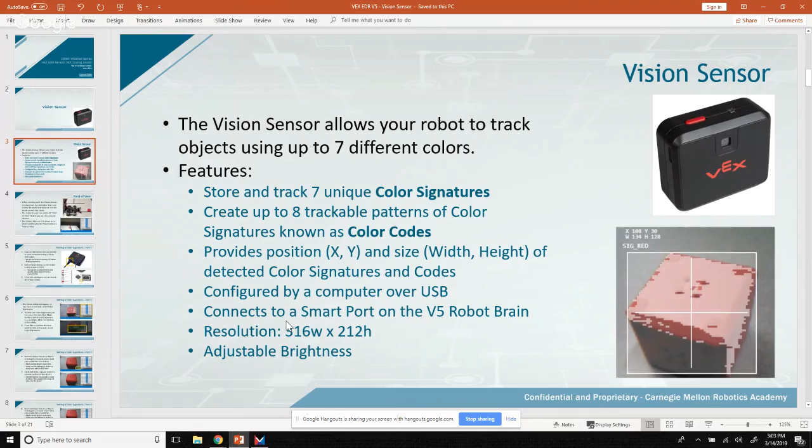So as I mentioned, a big thing that you want to keep in mind with this sensor is something called field of view, which is just understanding how the sensor sees the world.

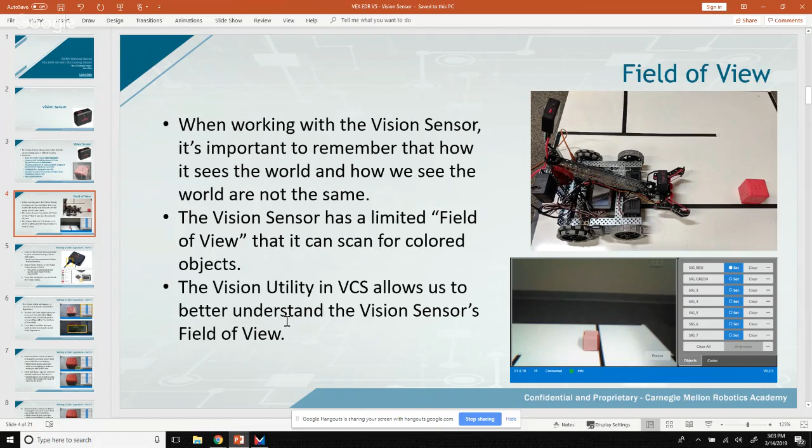Okay, so to get started with the vision sensor, one of the first things that you'll need to do is configure it to train these different colors. Doing so is a relatively straightforward process, but there are a number of steps.

The very first step is to connect the vision sensor to your computer using the micro USB cable. If you look at the bottom of your vision sensor, you'll notice there are 3 different ports: a USB port, a VEX port, and a V5 port. To train it, we will do so over USB.

Next, inside of the training process, we have to add the vision sensor to the robot config screen of VEX Coding Studio. I will actually show these steps after I go over them in the slides - I'll bring up the utility and show all this, but I do want to make sure these steps are all documented for whenever you play it back or try to follow along.

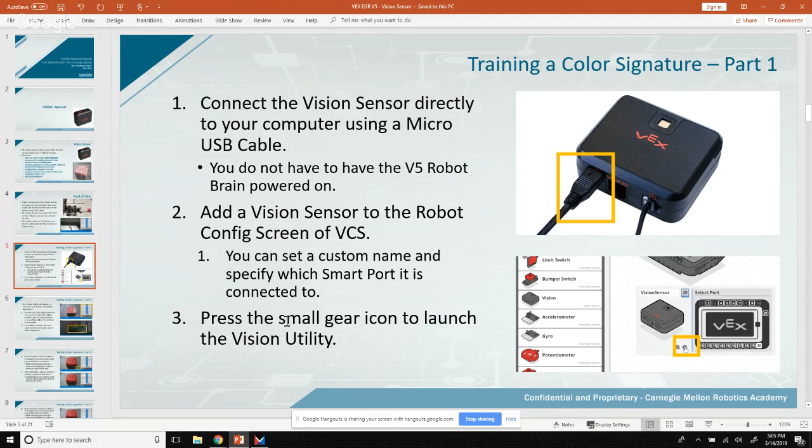Okay, so you drag a vision sensor into the robot config screen. That allows you to give it a custom name, and it allows you to set which port it's connected to - all important stuff. But then also there's the small gear icon in the bottom of the config. If you click on that, it will launch something called the Vision utility.

Okay, so when the Vision utility appears, it has tabs for colored objects and also codes. By default, the object screen should appear. Your vision sensor may have already been trained - it may have some training data. If you want to train it, you can hit the Clear All button, or you can individually clear each signature that is inside of there.

To begin training your vision sensor for a custom object, aim it so that the field of view is prominently facing the desired object. Solid colored objects work best here.

Almost as if you were drawing a square in Microsoft Paint, you click and drag a square over top of that object. This is important because a colored object isn't actually one color. Depending on how light hits it, and what type of light hits it, it's actually a range of different colors to the camera. We might identify a red cube as red, but the sensor sees different hues and color codes across all the pixels that make up the cube. So drawing a square over top of it tells the sensor you want that range of colors to be defined and stored.

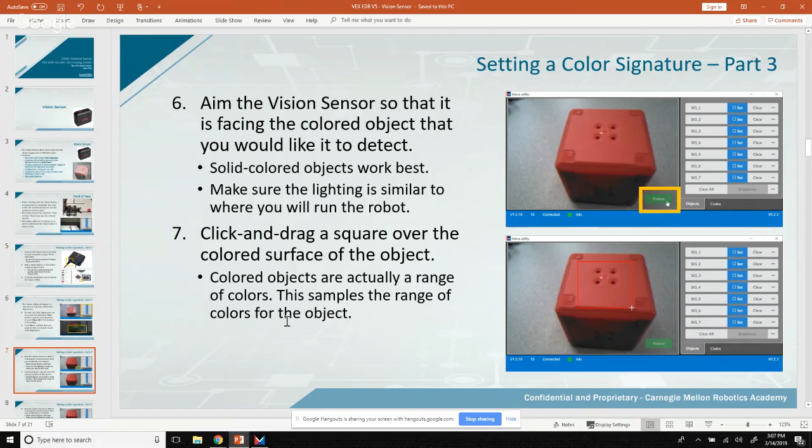While you are aiming the vision sensor at that object, you can press the freeze button, which will freeze the frame so it won't move around on you. Then you click and drag that square over top of the object.

Once you've drawn a good square over the object, choose one of the set boxes on the right side. You should notice the frame immediately gets filled with a box and a semi-transparent layer that shows how much of the object is being recognized by the color signature. If after pressing set you only get spotty coverage, that might mean your initial square wasn't big enough.

But you can also adjust it. If you find that your bounding box, the square, is either not inclusive enough or too inclusive, you can use the slider to the right of the signature to increase or decrease the tolerance.

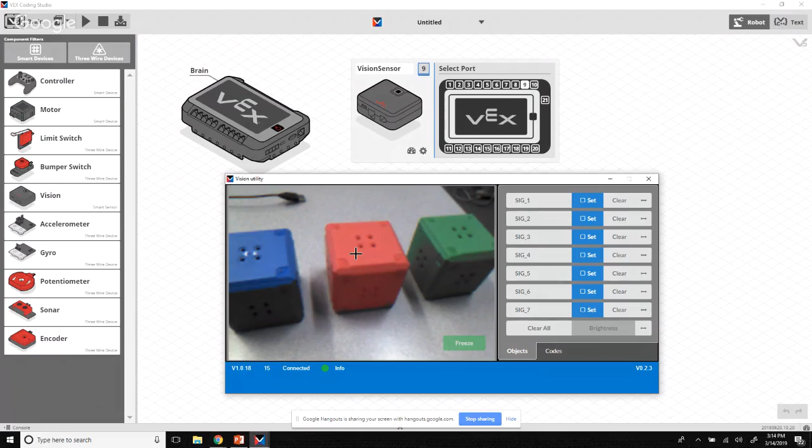I'll start with red. I'll click and drag a square over top of my red cube, choose set, and you can see immediately it begins recognizing SIG1 as that color range. I think I could safely increase it a little bit to pick up some more colors there.

Then I'll change the default name to SIG Red. I can draw another box if I want around another one of the objects, say blue.

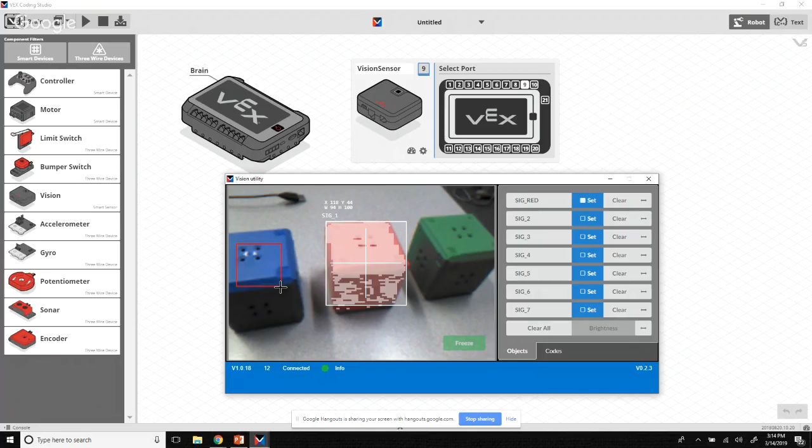What to be careful of is if you drag your slider too far, you start to pick up unwanted colors from the environment. So in addition to having good coverage of your object, make sure that you're not capturing colors that show up inside of the background.

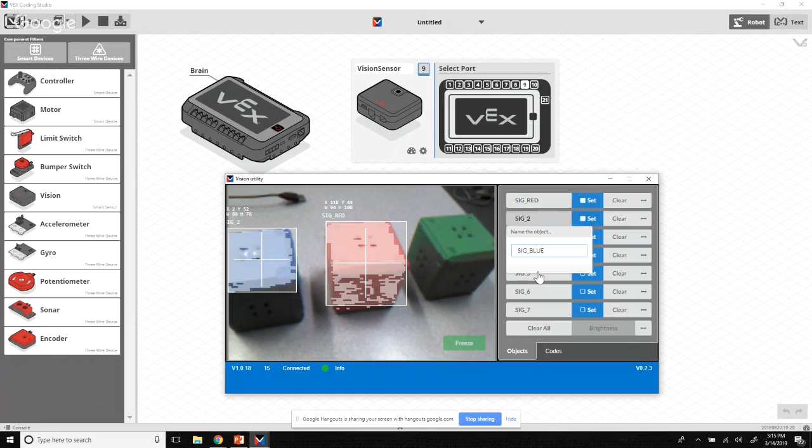I'll also change the name of that to Sig Blue. Now, if I unfreeze it, I can see that my robot, specifically the vision sensor, is able to detect sig red and sig blue as I move it around.

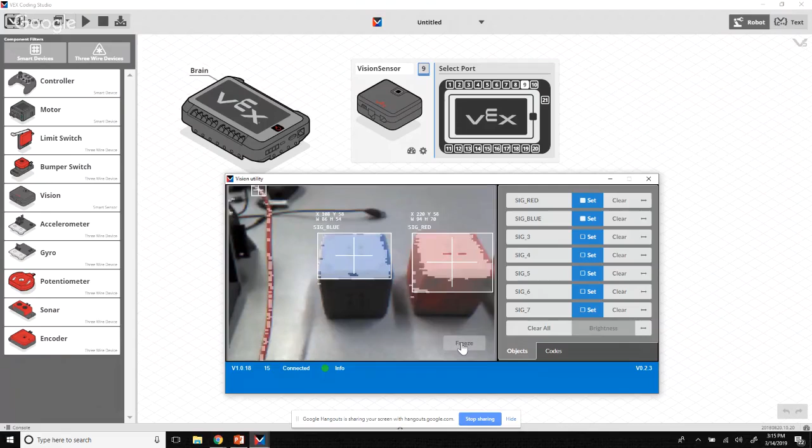That's pretty cool. Not only can it give me an idea of how far away, but it can also tell me which object is which—it can find the red object versus the blue object, which is super helpful for a ton of applications.

If you're thinking about using this inside of a competition, you can imagine how you might use this to find a game object, to shoot at a goal, or locate a different goal. It depends on the different games, but there are certainly a ton of applications to make your robot pretty smart here.

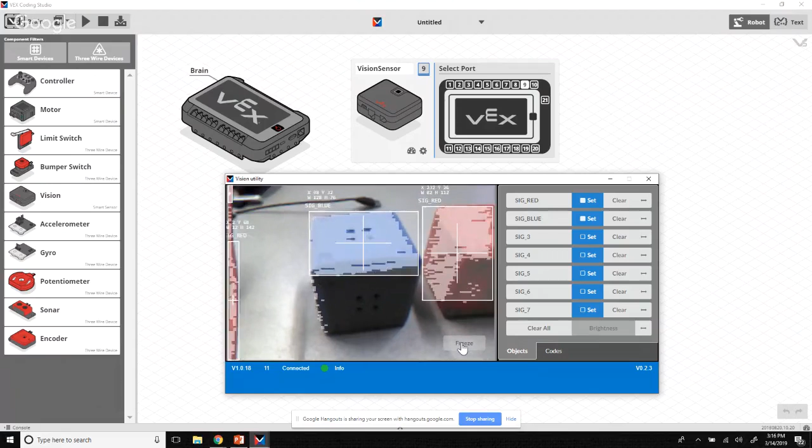Being able to see the X, Y, width, and height values on the screen is pretty helpful, but I think we could do something a little cooler: we could use those values to draw a square on the V5's screen. That's what this program does. We call this program Draw Blob.

Historically, inside of the camera world, inside of the vision sensor world, that collection of data you get back from a colored object—X, Y, width, and height—is sometimes called a blob. Don't ask me why, but that's what it is. Since we have those values, we can draw a square of proportionate size on the screen.